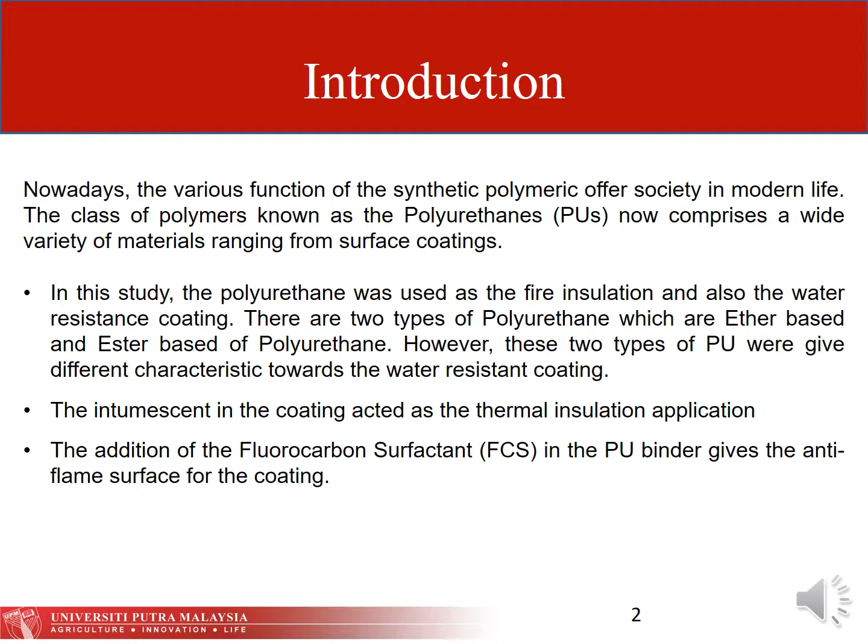Coming to the objective section, this study was carried out to investigate the effectiveness of the fire and water resistance of the formulated polyurethane intumescent coating with different coating additives, which are ether-based polyurethane binder and fluorocarbon surfactant.

The objectives of this study are: first, to investigate the performance of the formulated polyurethane intumescent coating in thermal and physical behavior. Second, to determine the outcomes of different types of ether-based polyurethane binder towards water-resistant coating. Third, to determine the effect of the addition of fluorocarbon surfactant in the ether-based polyurethane binder towards the anti-flame spread application. Finally, to determine the morphology of the coating surface effect due to different curing times.

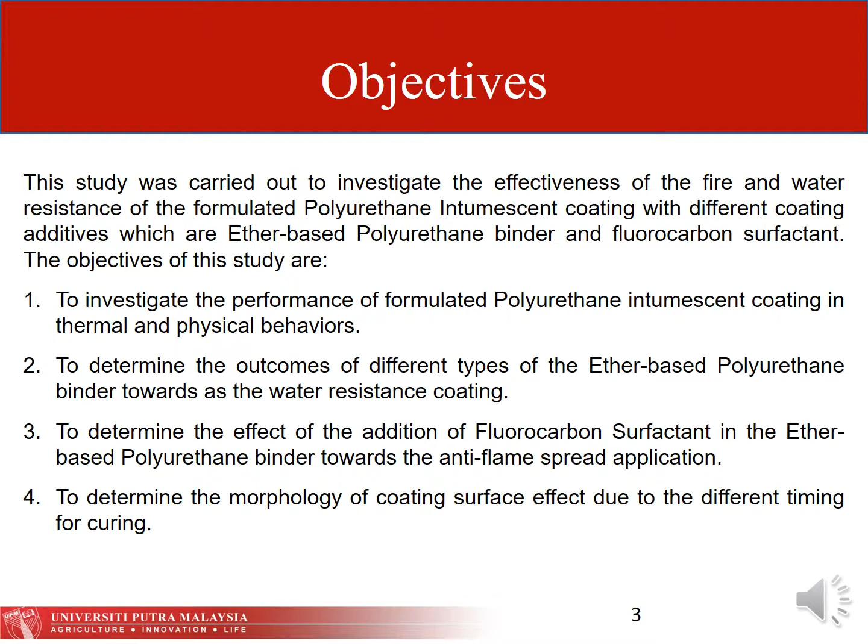For assumptions and hypotheses of this study, first, this study expected that the specimen would be able to withstand around 1000 to 1200 degrees Celsius of butane torch for more than 60 minutes without any penetration through the specimen.

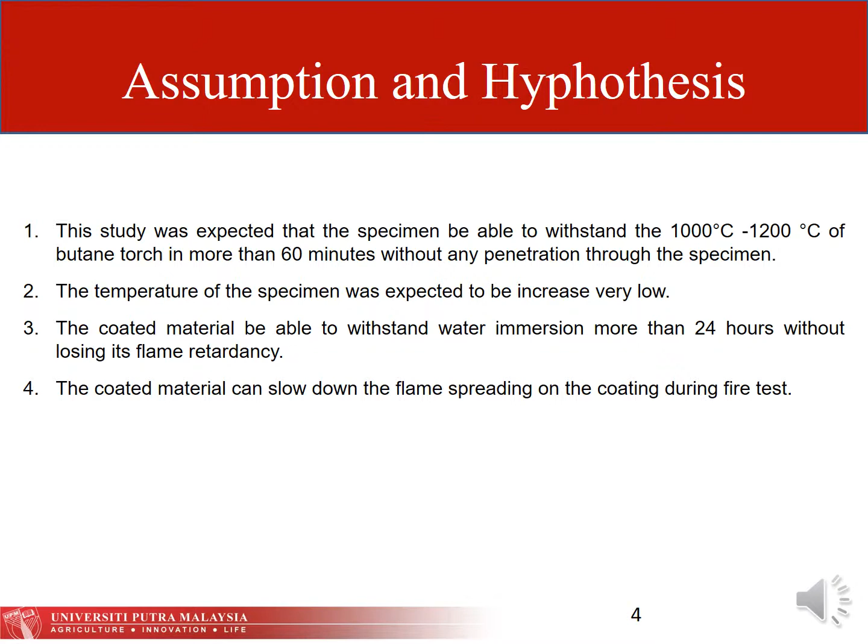Second, the temperature of the specimen was expected to increase very slowly. Third, the coated material should be able to withstand water immersion for more than 24 hours without losing its flame retardancy. Finally, the coated material can slow down the flame spreading of the coating during fire tests.

Coming to the literature review section. Polyurethane's one common feature to all PUs is the urethane linkage, which is formed by the reaction of a hydroxyl group with an isocyanate group. However, the urethane linkage is not the only linking group in the structure; other links include the ester and ether type links present in the PU precursor.

Although the flammability of PU might be expected to be lower than that of many other polymers due to their significant nitrogen content and the cross-linking usually present, due to the high product surface area, especially in foams, the fire performance of PU-based materials is often poor.

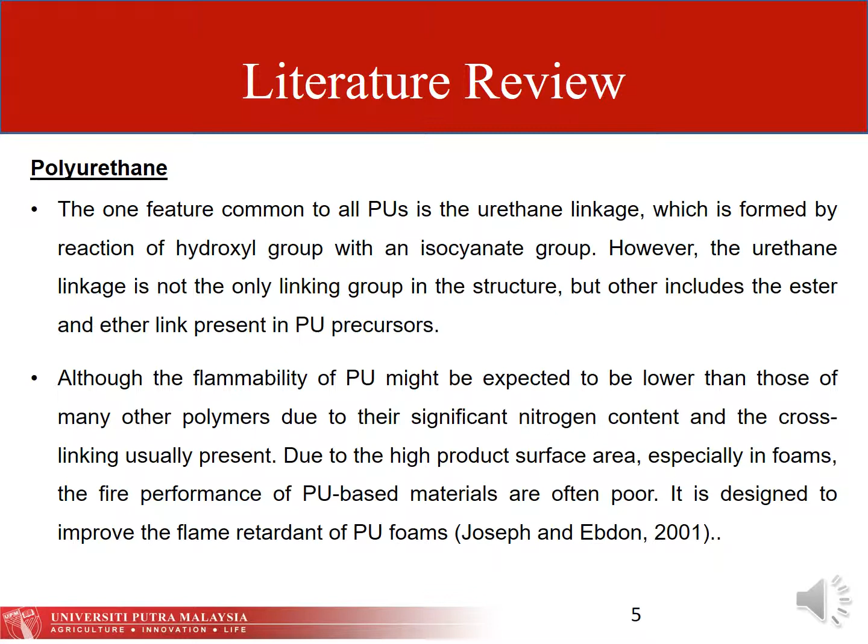According to Joseph and Ebdon, it is designed to improve the flame retardancy of PU foams. There are two types of polyurethane.

First, ester-based polyurethane. Ester-based polyurethane is slightly more rigid and supportive compared to the ether relative. The shock absorption produced out of the ester foam results in excellent packaging qualities, lending it to being treated with agents to create pink anti-static foams that dissipate electrostatic charge in sensitive electronic equipment and instruments.

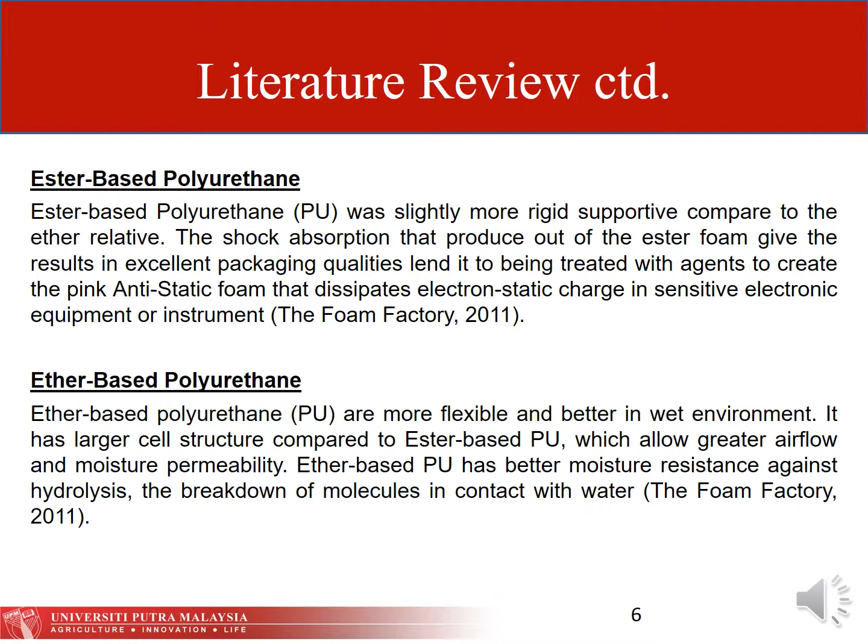Next, ether-based polyurethane. Ether-based polyurethane is more flexible and better in wet environments. It has a larger cell structure compared to ester-based polyurethane, which allows greater airflow and moisture permeability. Ether-based PU has better moisture resistance against hydrolysis, the breakdown of molecules in contact with water. In conclusion, ether-based polyurethane has more water-resistant characteristics compared to ester-based polyurethane.

For intumescent, intumescent can be described as fire retardant technology which causes an otherwise flammable material to foam, forming insulating barriers when exposed to heat. A common characteristic of intumescent materials is that heat exposure initiates a chemical process that makes the material intumesce. It is the intumescent and porous part of the material which gives the insulation effect.

According to Vandersall and Flamm, solidification into a thick multicellular char provides an insulating layer that slows down the transport of heat and reduces the amount of material that becomes involved in the fire.

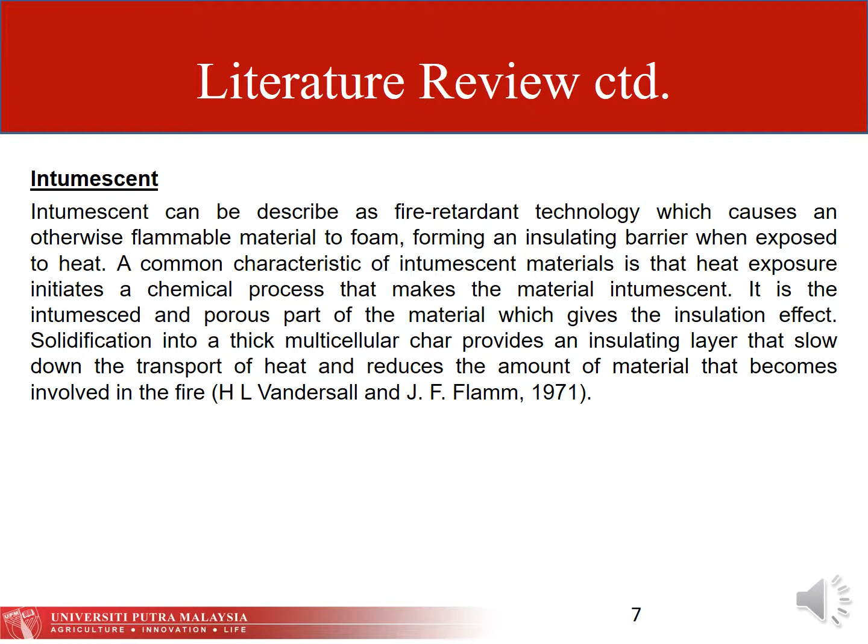Coming to the methodology part: preparation of the formulated polyurethane intumescent coating. The optimum weight ratio of intumescent powder, ester-based polyurethane binder, and distilled water is 6.25 to 1 to 4.

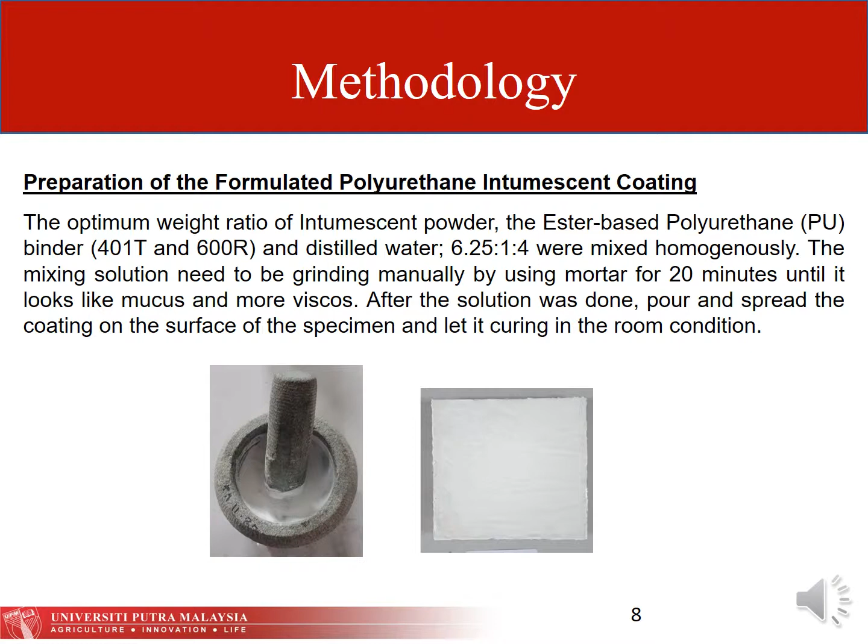It was mixed homogeneously using a mortar for about 20 minutes until it looked like mucus and more viscous. After the solution was done, pour and spread the coating on the surface of the specimen and let it cure in room condition.

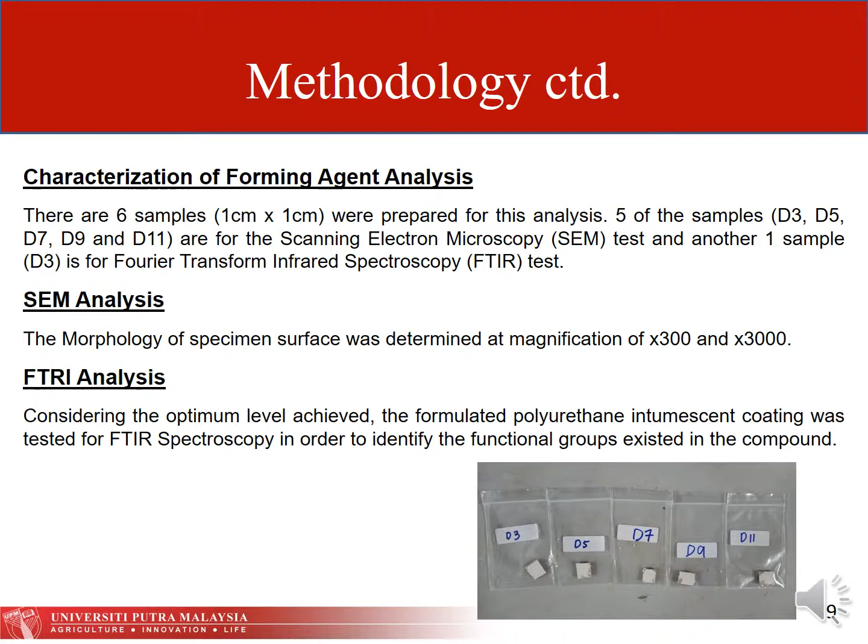For FTIR analysis, considering the optimal level achieved, the formulated polyurethane intumescent coating was tested for FTIR spectroscopy in order to identify the functional groups existing in the compound.

Fire resistance test: the fire test is conducted to evaluate the penetration of fire through the substrate according to ASTM E119, followed according to UL1709, 3rd edition. The fire resistance test was performed using a blowtorch and thermocouple, with the setup as shown in the figure.

First, coat the specimen with formulated PU intumescent. The average thickness of the coating is around 0.73 mm. It is cured for 14 days, and after that, torch the specimen using the butane torch and record the time taken for the fire to penetrate through the specimen.

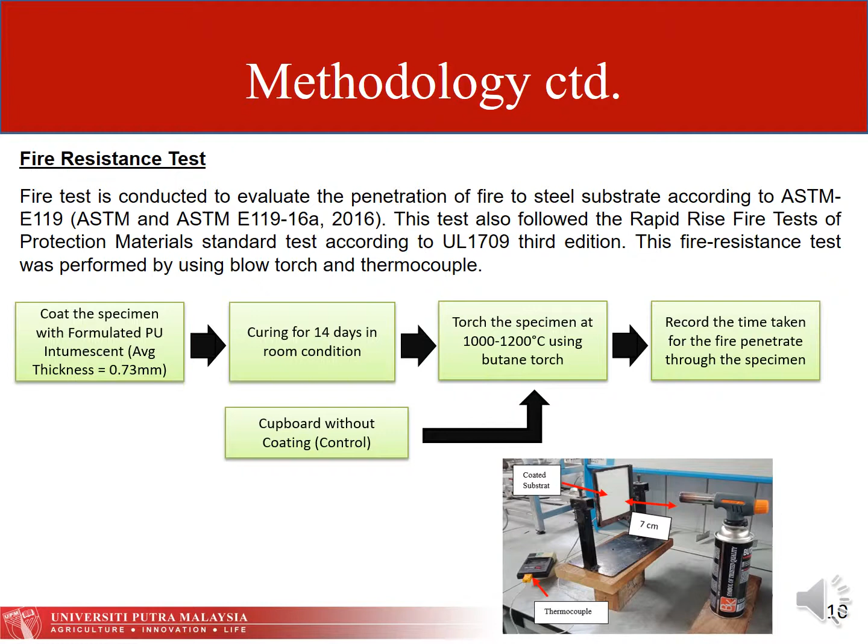Repeat using cardboard without coating as the control specimen. For the water immersion test, the average thickness of the ether-based PU binder is around 0.41 mm. First, coat the specimen with ether-based PU binder using a paintbrush, then cure for 5 days.

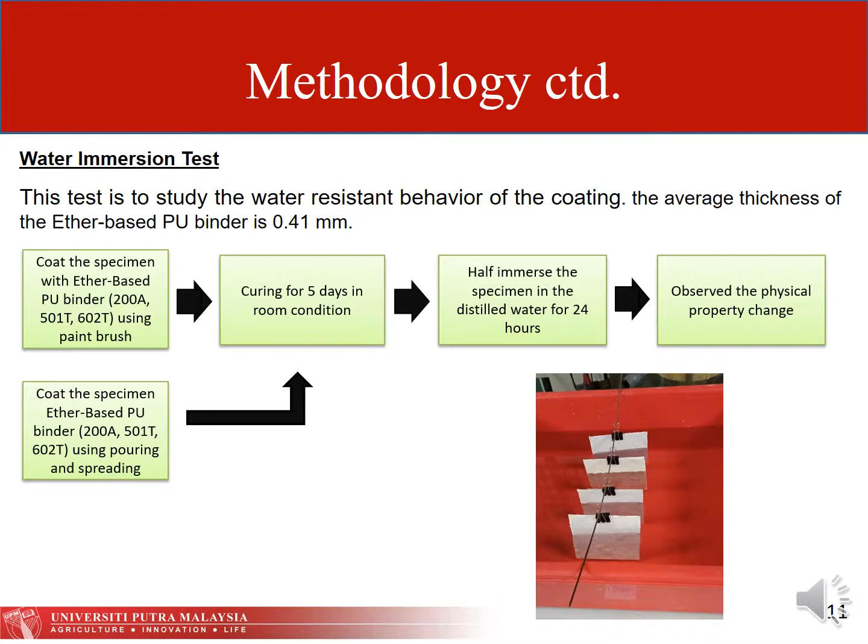Next, half-immerse the specimen in distilled water for 24 hours as shown in the figure, then observe the physical property changes. Repeat using the same method but with a different coating method, which is pouring and spreading. For the anti-flame test, this test is to study the surface fire spread of the ether-based polyurethane binder coating.

The setup was same as the fire test. First, coat the specimen with addition of 1% fluorocarbon surfactant in 602T PU binder. The average thickness of the coating is around 0.23 mm. Curing it for 5 days in room condition, then torch the specimen for 10 seconds using a butane torch, then observe the fire spread on the specimen surface.

Repeat using the same method, but the coating is without fluorocarbon.

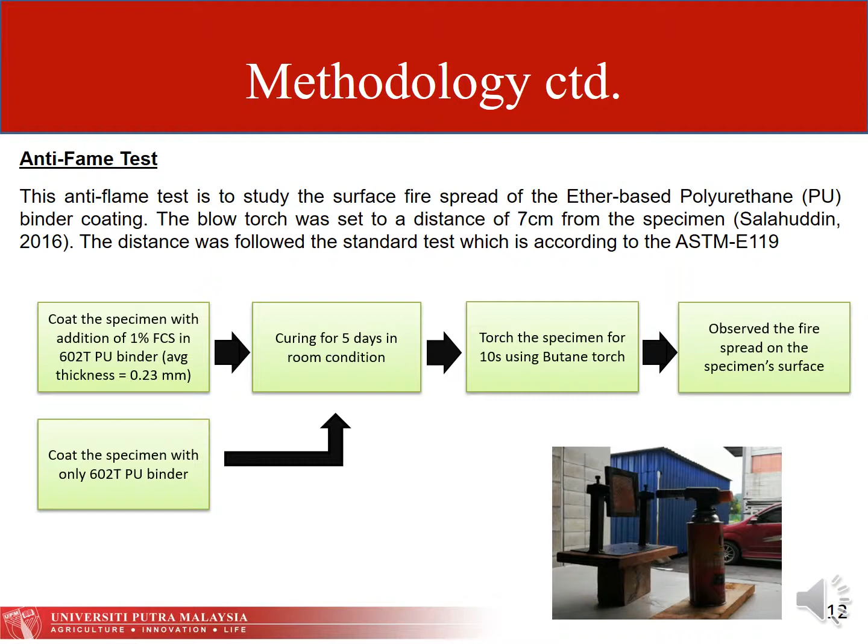Comes to result and discussion. Optimization of curing time with mass of coating. The mass of coating starts to be constant at day 5. It can be concluded that the best day of formulated PU intumescent coating for curing is at day 5.

Then for the minimum curing time is at day 3. This minimum curing time can be used in the next experiment, which is the water immersion test. This is because at the minimum time of curing, the coating is ready to be used for other experiments without changing its characteristic. They are losing some weight due to moisture loss.

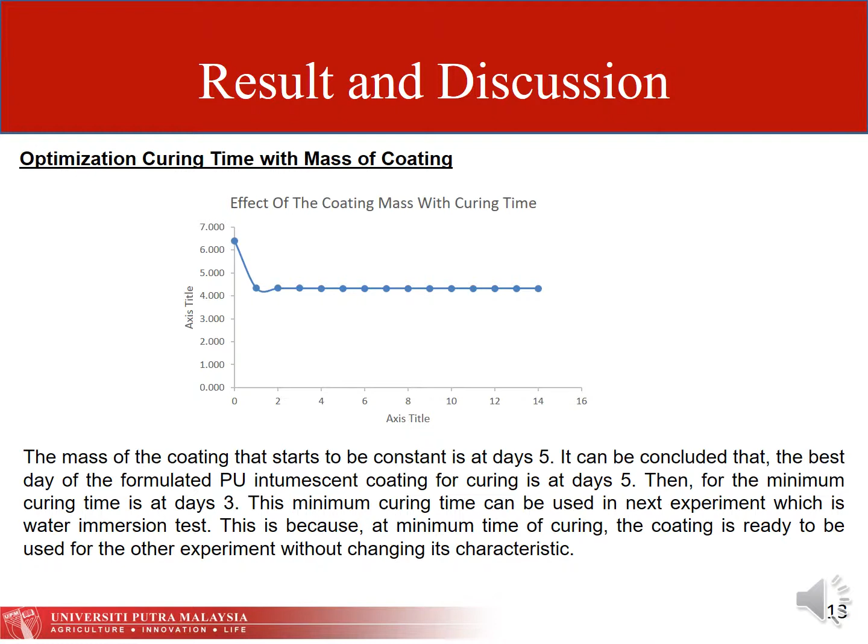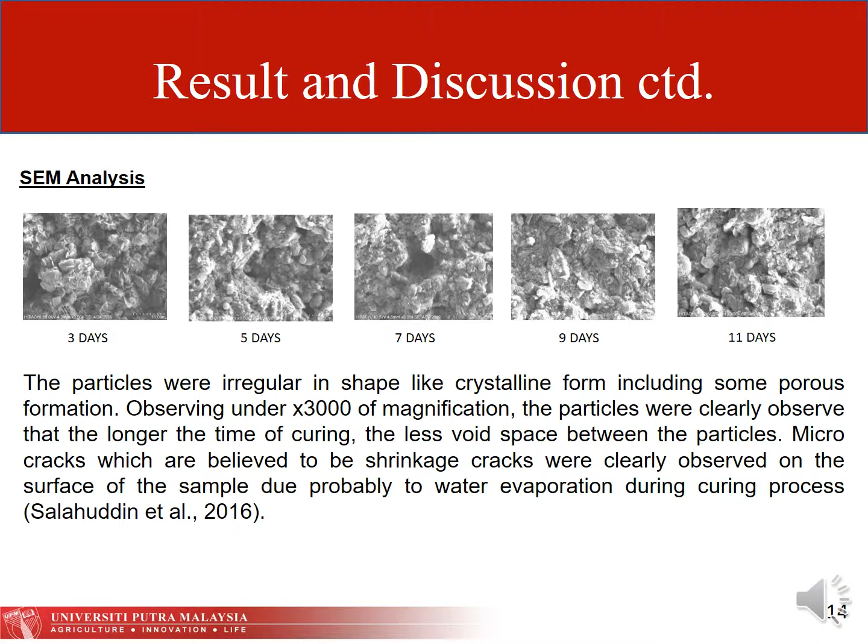For SEM analysis, the particles were irregular in shape like crystalline form, including some porous formation. Observing under 3000x magnification, the particles were clearly observed that the longer the time of curing, the less void space between the particles. Micro cracks, believed to be shrinkage cracks, were clearly observed on the surface of the sample, probably due to water evaporating during the curing process.

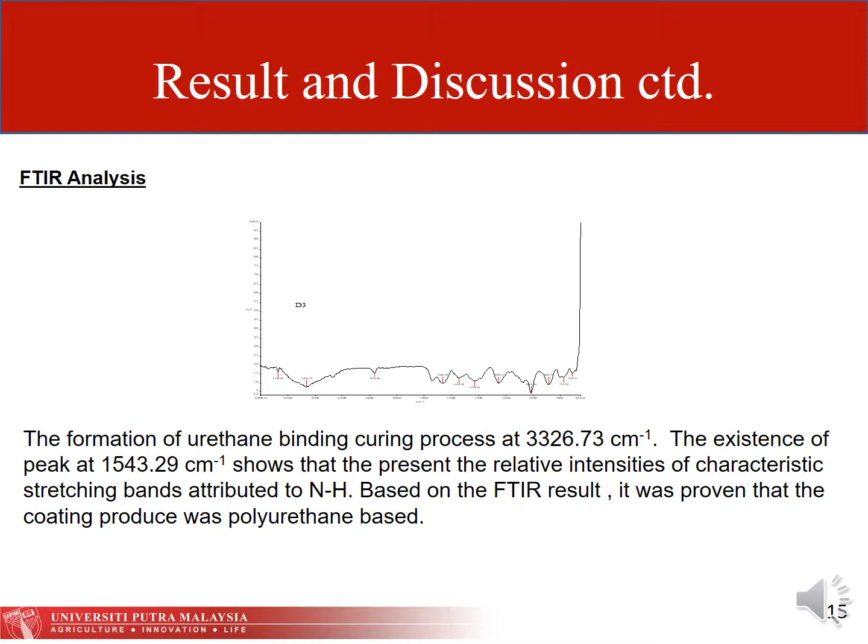Comes to FTIR analysis, the formation of urethane binding during the curing process at 3326.73 wavelength, and the existence of a peak at 1543.29 wavelength shows the presence of relative intensities of characteristic stretching bands attributed to NH. Based on the FTIR result, it was proven that the coating produced was polyurethane based.

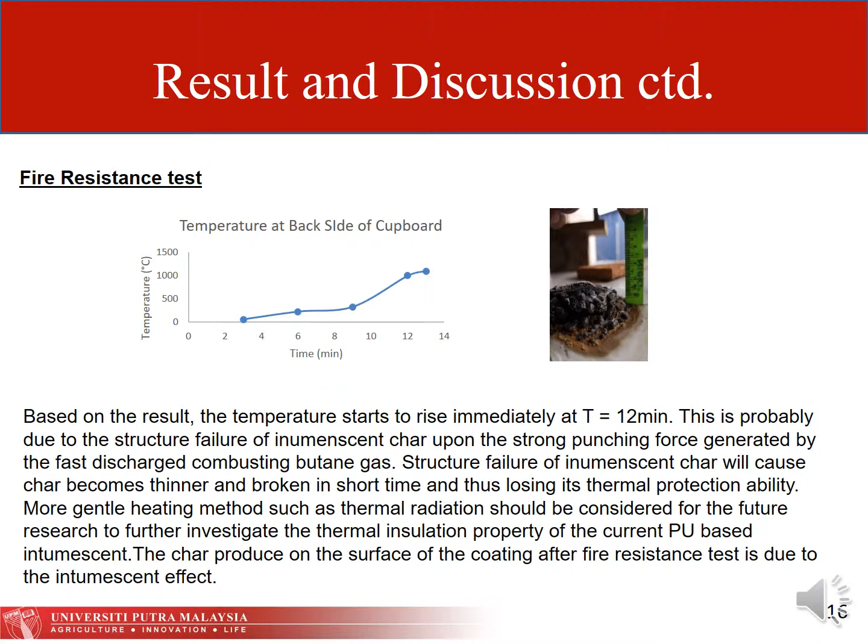More gentle heating methods such as thermal radiation should be considered for future research to further investigate the thermal insulation property of the current PU-based intumescent coating. The char produced on the surface of the coating after the resistance test is due to the intumescent effect.

In the water immersion test, the amount of bubbles on the surface of 602T were very least compared to others. 200A does not show any water resistant characteristic. This is because the polymer molecules are not so hydrophilic and have less polarity, so the chemical bond between the formulated PU intumescent substrate surface and 200A was not strong, and the polymer molecules tend to shrink and gather together to minimize the interface energy, causing cracks.

The best method to coat the specimen is by pouring and spreading it on the surface instead of using a paintbrush. This is because uneven distribution of the coating on the surface can cause some holes or voids to be produced on the surface, allowing water to penetrate through the ether-based PU binder coating and reduce the performance of the coating as water resistance.

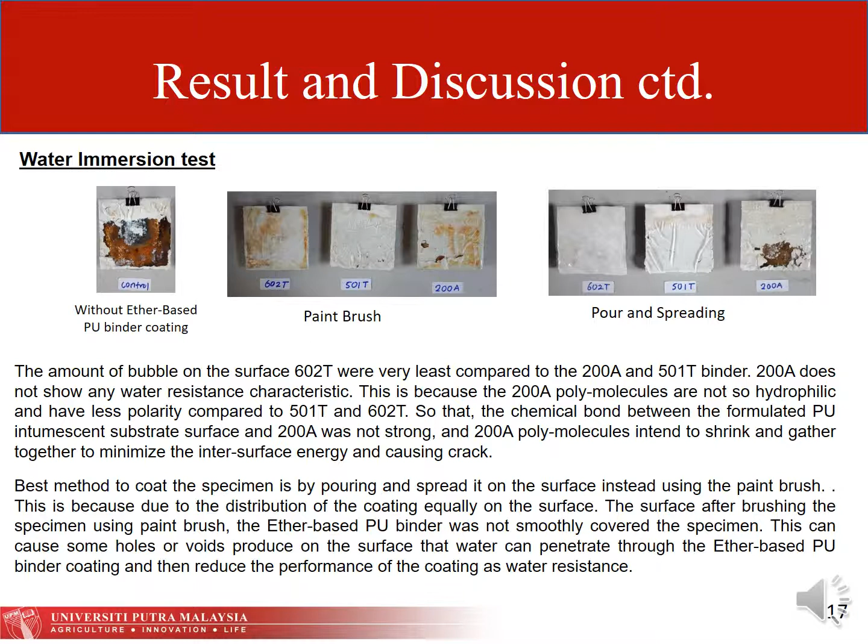In the anti-flame test, based on figure A, the fire was splashed out and spread rapidly on the surface as soon as the torch was removed, compared with figure B. This is because the presence of fluorocarbon surfactant will inhibit the fire spread on the coating. 602T coating without fluorocarbon surfactant does not show any positive result on the anti-flame spread application.

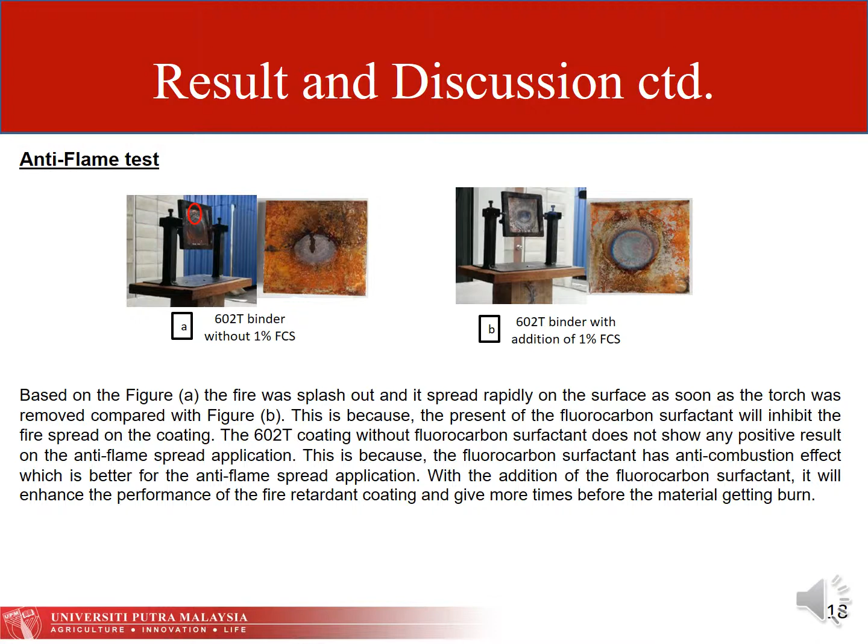This is because the fluorocarbon surfactant has an anti-combustion effect, which is better for the anti-flame spread application. With the addition of fluorocarbon surfactant, it will enhance the performance of the fire retardant coating and give more time before the material gets burned.

Comes to conclusion. The optimum weight ratio of the formulated intumescent powder, ester-based polyurethane binder, and distilled water was 6.25 to 1 to 4. The average thickness of the PU-based intumescent coating, ether-based PU binder coating, and FCS coating was 0.73 mm, 0.41 mm, and 0.23 mm respectively. SEM analysis on the morphology of the coating behavior has shown that the longer the time of curing for the coating led to fewer voids between particles.

The performance of the formulated PU intumescent coating was determined by the fire resistance test. The time taken for the fire to start penetrating through the specimen is about 13 minutes and 5 seconds. This is probably due to structural failure of the intumescent char upon the strong punching force generated by the fast discharge of combusting butane gas. The best binder as additive on the formulated PU intumescent coating was 602T.

The result was clearly observed after the water immersion test. The amount of bubbles on the surface was very least compared to 200A and 501T binder.

The addition of 1% fluorocarbon surfactant in the 602T binder proved that it inhibited the fire spread on the coating compared to 602T without the addition of fluorocarbon. This is because the fluorocarbon surfactant has an anti-combustion effect, which is better for the anti-flame spread application.

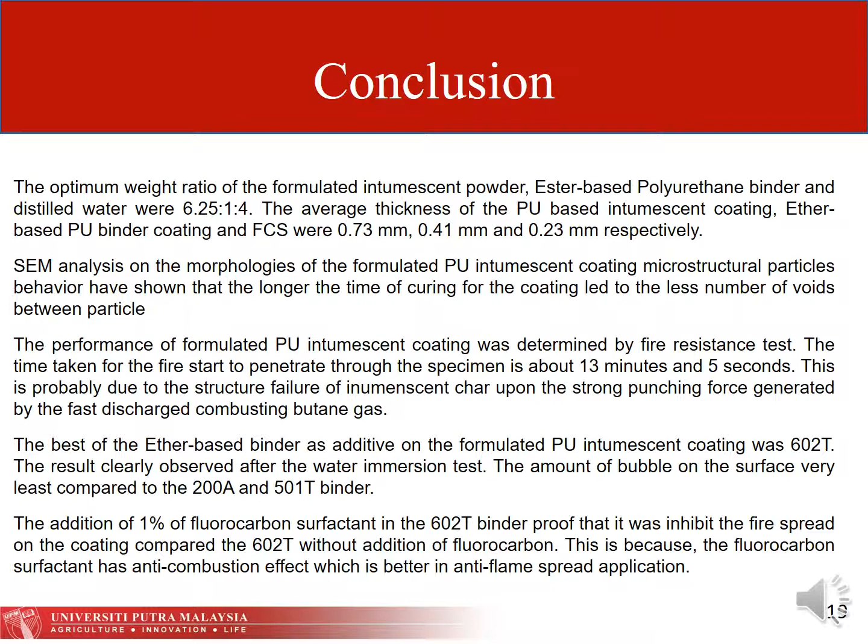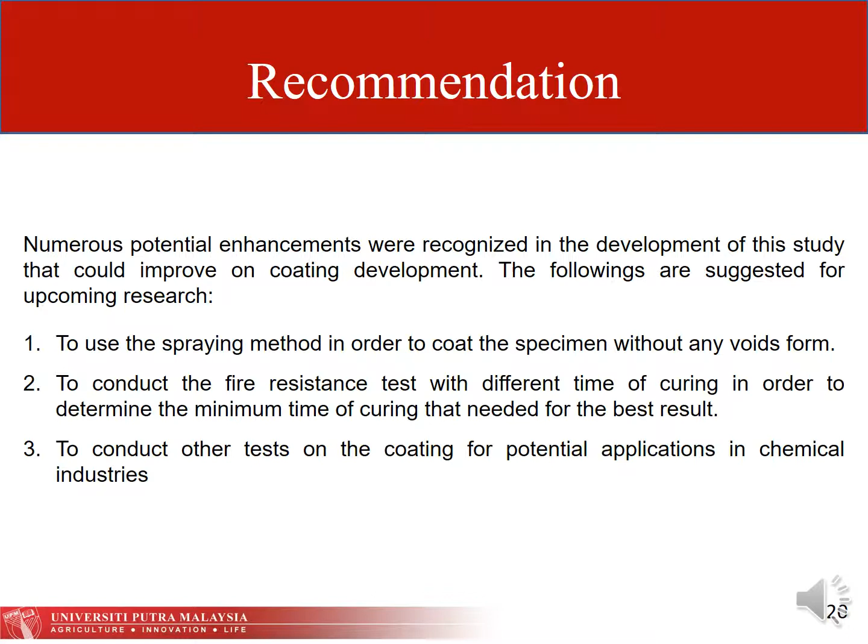Numerous potential enhancements were recognized in the development of this study that could improve coating development. The following are suggested for upcoming research. First, to use the spraying method in order to coat the specimen without any voids formed. Second, to conduct the fire resistance test with different time of curing in order to determine the minimum curing needed for the best result. Third, to conduct other tests on the coating for potential application in the chemical industry.